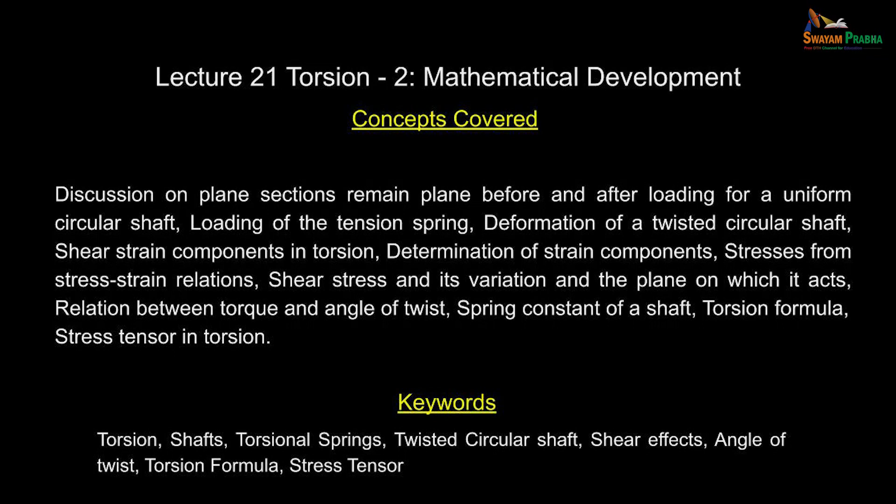Let us continue our discussion on torsion. We have done the thought experiment followed by an experiment, and we have understood certain aspects of torsion.

What we did was we hypothesized that a radial line deforms into a curve. We started deliberately with a wrong hypothesis, and then we looked at the geometry of deformation, and the main point of discussion was invoking the symmetry.

I was able to invoke the symmetry mainly because the cross section is circular. So about this axis, the geometry is symmetric. I consider the material as isotropic, so elastic properties are identical along any direction, and the boundary conditions are also symmetric about the axis.

Based on that, we have concluded that straight lines will deform into straight lines, and we have also verified by the thought experiment: when you rotate it by 180 degrees, what you have at the bottom surface is identical to the top surface. We have not only done the thought experiment, we have also seen it in the actual experiment.

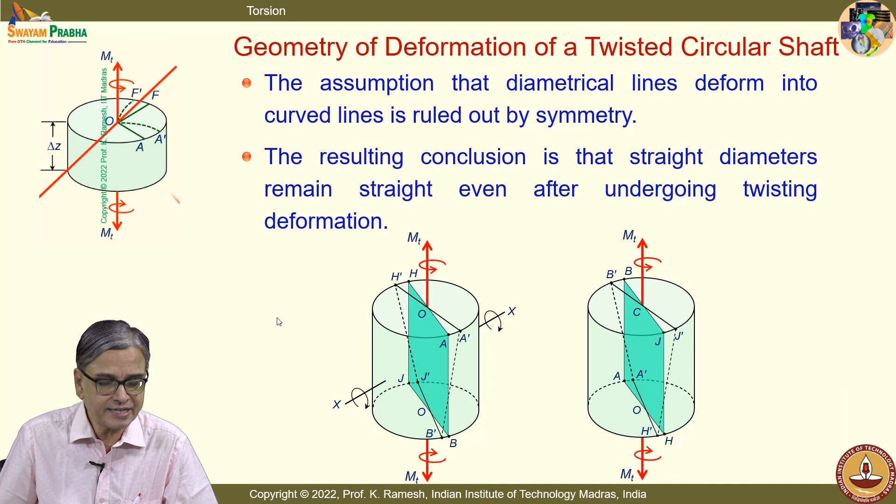So the first understanding is the radial lines will deform into radial lines, and we also observed from the experiment that these radial lines lie on the same plane. Nothing happens to that plane. We have not done a thought experiment for this, but we have done the actual experiment and seen that the plane remained horizontal. But I can also investigate that by a thought experiment.

The only requirement is that the deformation should be symmetric about the axis. Here I can consider that this bulges out and is symmetric about this axis. This happens on every cross section, so this cross section also bulges out, and we know how to test symmetry.

If I rotate the whole system by 180 degrees, it should come out the same shape, which is not going to be the case, because when I rotate it, since it is bulged, I would have this as a cup. So this violates symmetry.

So from the thought experiment also, you can say that these planes remain plane. It is a very important concept. It is also taken as an idealization, but when you perform an experiment, you see that very clearly. So it is no more a thought experiment, we have captured reality in all its totality for a circular cross section.

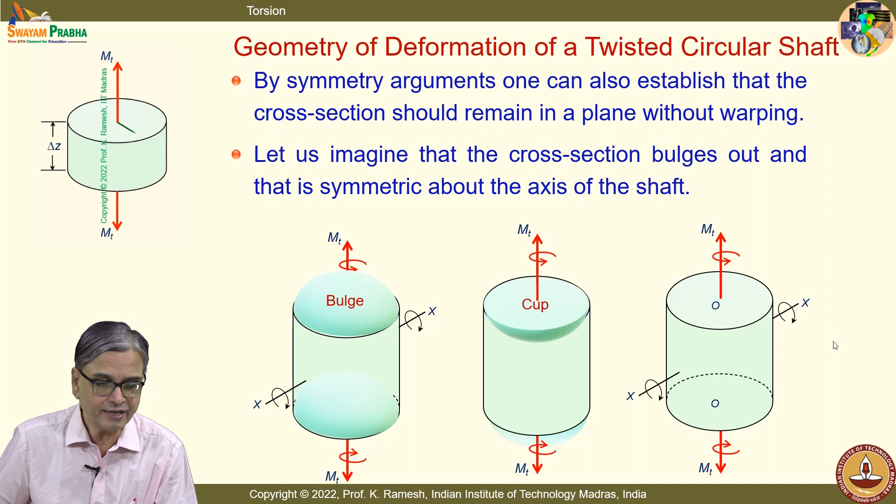This is for a slender member where the deformations are small. All these attributes you should look at. So when I rotate it, you will have the same thing, which is very clear and obvious.

Now I have a circular shaft that is twisted, and you see the horizontal plane as this red line, and the vertical lines drawn in blue. This is a cylindrical object; the line drawn at the back is magnified because it behaves like a lens, that is why you see that shade of blue thick here. You could see very clearly that these lines remain horizontal, and then you have these two lines sheared.

In the case of a square shaft, this line does not remain horizontal, but has a shape like this. My hand was shaky, so when drawn free hand, some kinks are seen, but imagine this is a smooth line. So this has ups and downs, and this is labeled as warping in the literature. We don't go into the analysis of a square shaft in this course.

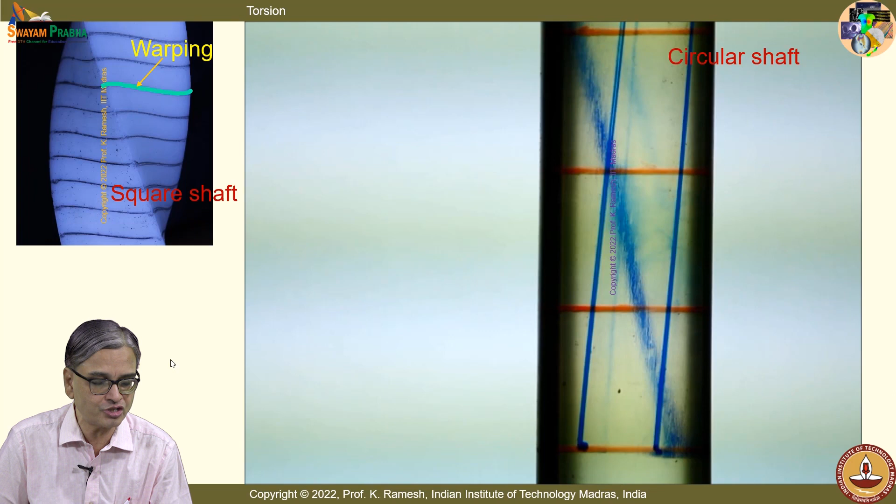In the case of a circular shaft, one of the important understandings is that plane sections remain plane before and after loading for a uniform circular shaft. It's a very, very important observation.

In fact, when we graduate to bending, we would use the same idealization and choose an appropriate loading which satisfies that and develop the bending theory. Whole of strength of materials hinges on plane sections remaining plane before and after loading, because using this assumption we are in a better position to appreciate what deformation is possible.

Once you have captured the deformation, you don't require to solve this by solving a boundary value problem. The deformation is understood; from the deformation, write the strain; from strain, you write the stress-strain relations. So the complete solution is obtained.

So the key point here is how well you have pictured the deformation clearly. What we do in strength of materials is choose simple loading, simple cross section that satisfy this basic idea: plane sections remain plane before and after loading, which you will see for many problems later also. This would be satisfied, so I don't have to solve for deformation by solving the boundary value problem of the differential equations.

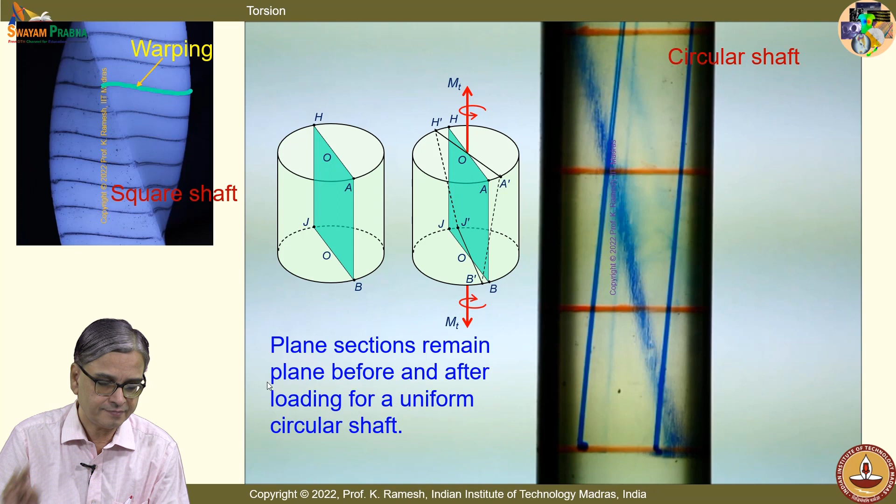I have asked you to exercise your thinking power to find out what happens in a spring, because we all start teaching deformable solids by taking the help of a spring. We use the spring only to illustrate that the force-deformation relationship is linear, and the other aspect is that spring stores energy. So all deformable solids will store energy.

When you look at the sketch, schematically it's easy to represent the spring like a zigzag line, and when you axially pull it, it opens up, and when you compress it, it closes up.

If you want to find out the way a spring resists load, it is not tension or compression. Is the idea clear? You have to look at how the spring is constructed.

The spring is coiled like this, and you apply the axial pull. It is coiled in such a manner that this forms the axis of the spring. So now what I will do is cut at one of the coils here, take this, remove it, and draw the diagram. This is the load that is applied.

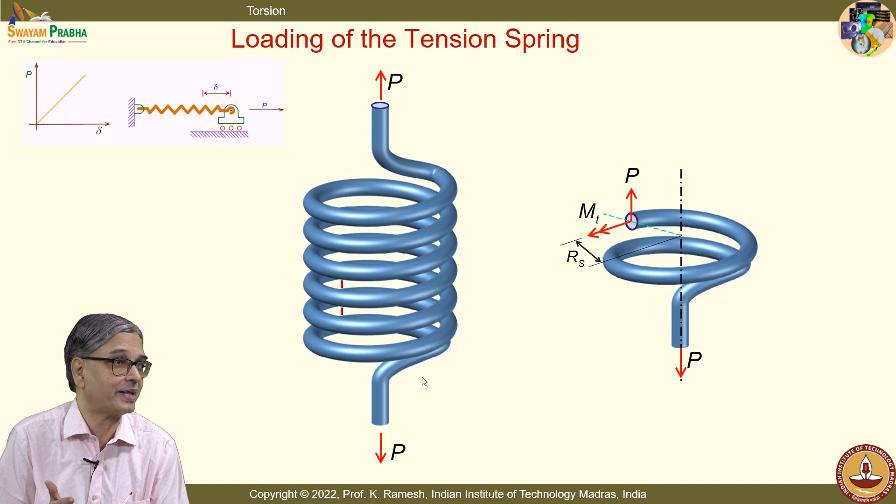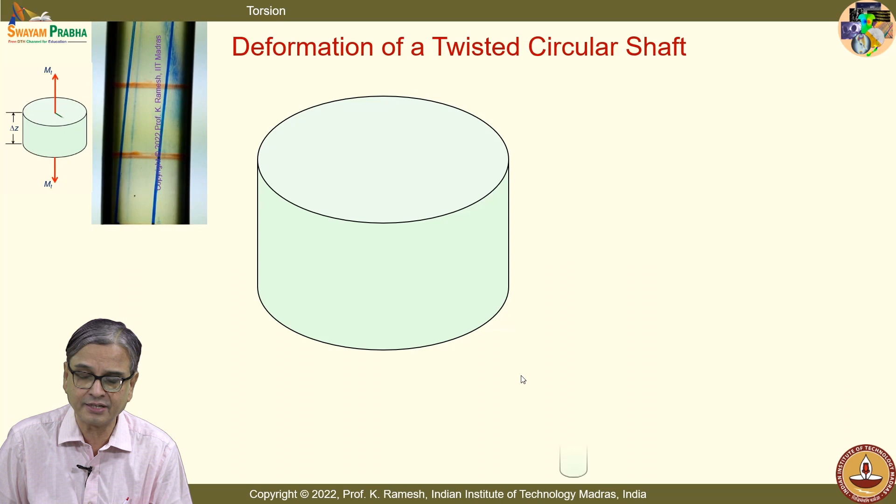Now you need to make neat sketches. I will show the animation slowly, and you have to keep in mind that we are again analyzing only a slender shaft. I take a very small section delta z. I have blown it up for clarity on what is happening in this small section. So don't get carried away by the size, it looks like a huge slab, but it's actually a very slender member.

I have taken an arbitrary section. You can draw the lines and also label them the way that I have done it. Take your time.

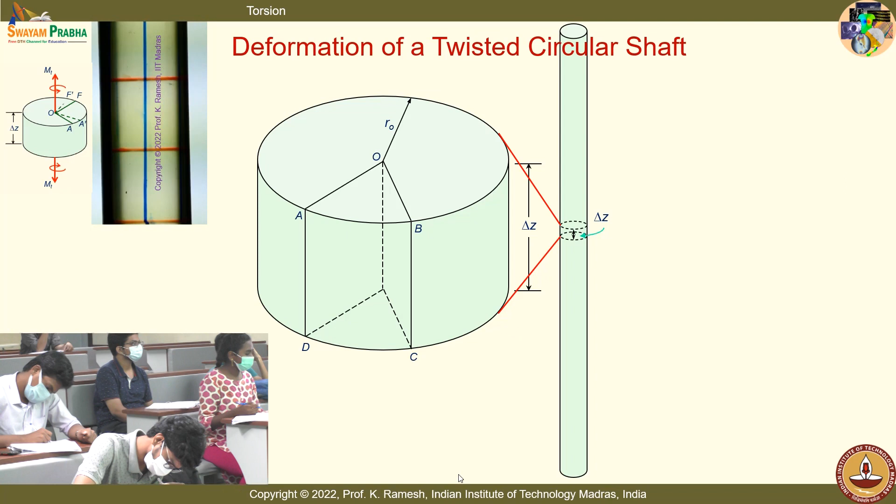What we are also going to do is find out what happens at an arbitrary radius r, on this interior part of the shaft. Because we have already seen, even before developing torsion, that shear stress varies linearly from the center to the outer fiber. So in order to develop that relationship, it is better that we take an arbitrary radius r and find out the dotted lines to start with. The axis of the shaft is taken as the z direction, with radial direction and theta direction. Because it is a circular geometry, it is better to go to polar coordinates.

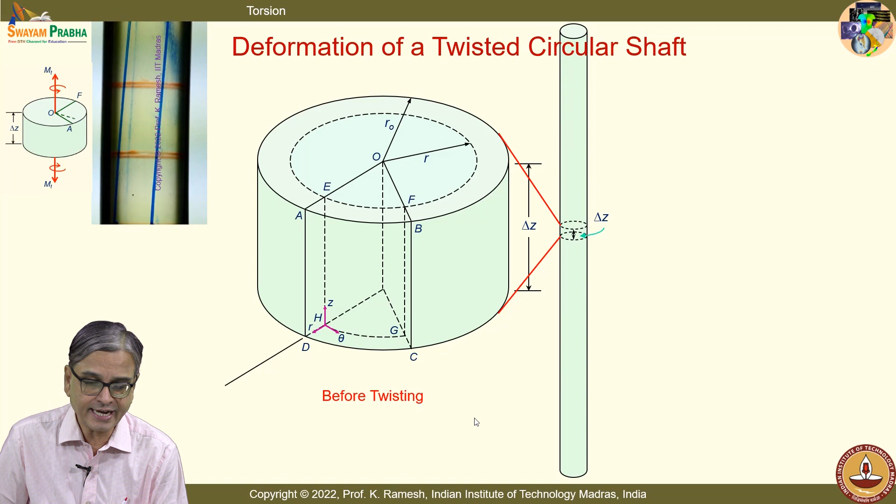This is before twisting, and this is a section somewhere in the middle of the slender shaft. Now what I do is apply a twisting moment. When I apply the twisting moment, I have the twisted shape here. That is what we have to understand, and then find out what kind of changes happen. You also have a nice animation continuously running, which will show you how to draw the deformed lines.

You will have to appreciate, I have a section far away from this end. This section would have twisted by an angle phi. And I have another section at distance delta z away, that is the top surface. It would twist by delta phi. I have phi and delta phi is what you will have to understand.

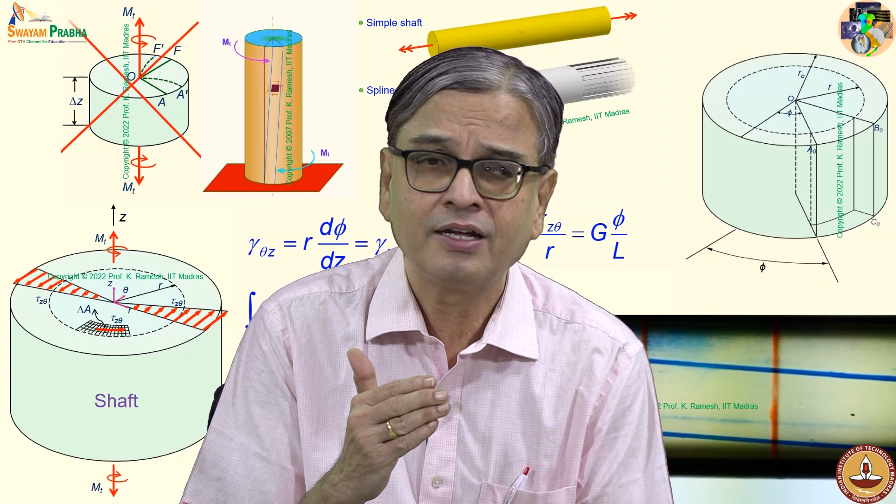So I have this, and I have drawn the same lines here. Whatever lines I drew earlier, my idea is to see how these lines deform because of applying the twisting moment. Once I understand the deformed position of these lines, we already have the definition of shear strain. Shear strain is nothing but change in the original rectangle. So we will have to investigate whether it remains as original rectangle after deformation, or is there any change.

So please draw this. First you have to appreciate, I have taken a section somewhere in the middle, because we do not want to study anything close to the load application point, because of Saint-Venant's principle. So we want to stay away from the end effects.

So when I apply the moment, the bottom of this section would have an angle of twist of phi, and just a slice away, that is delta z away, it will have another angle, which we have not drawn yet. Now we will draw this.

As far as the small section is concerned, only now I am going to put the twisting moment. Because of the twisting moment, this line shifts like this, drawn in red, and I have E1, F1, A1, B1 as the new position. D0 and D1 are identical, and C0 and C1 are identical.

And what you have is this original line E0, A0, that is the black line, and the deformed line is the red line, because we have already seen radial lines remain radial, so the line remains straight, and this small angle is delta phi.

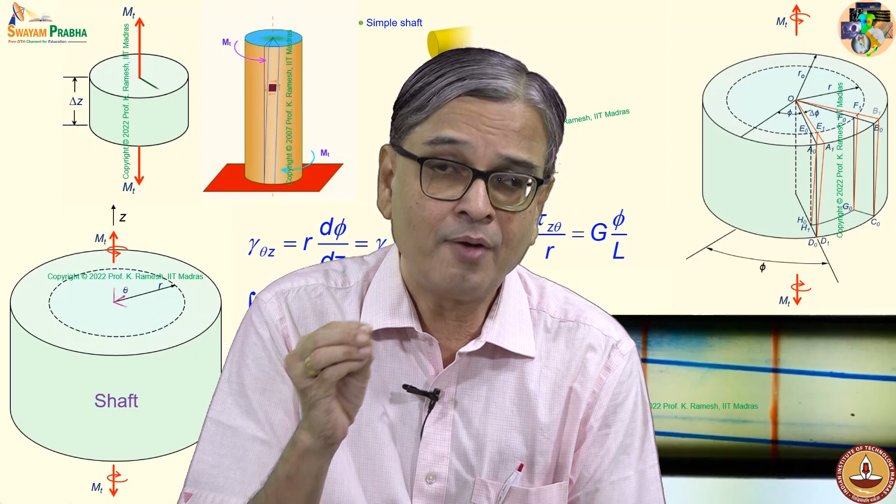We are going to investigate this deformation and find out which angles remain 90 degrees, and which do not remain at 90 degrees. That contributes to the appropriate shear strain, because we have already ruled out the existence of normal strains. You won't have epsilon z, epsilon r and epsilon theta - all three are 0. Among the 3 shear strains, which ones are 0 is what we will have to look at.

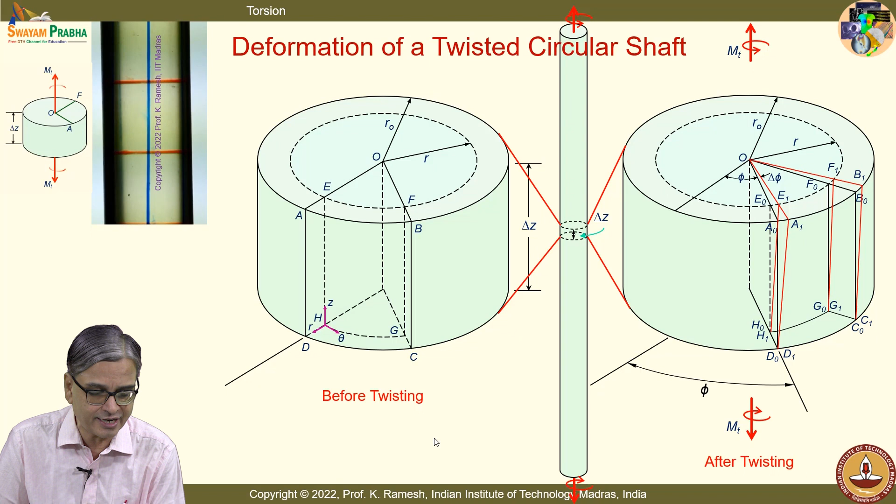But before that, we will first calculate the existing shear strain due to torsion, and this is again explained here. You have to appreciate why I have shown phi here, and why I have shown delta phi here. You should appreciate this, because it is taken somewhere in the middle of a slender shaft. So I have angle of twist as phi and phi plus delta phi.

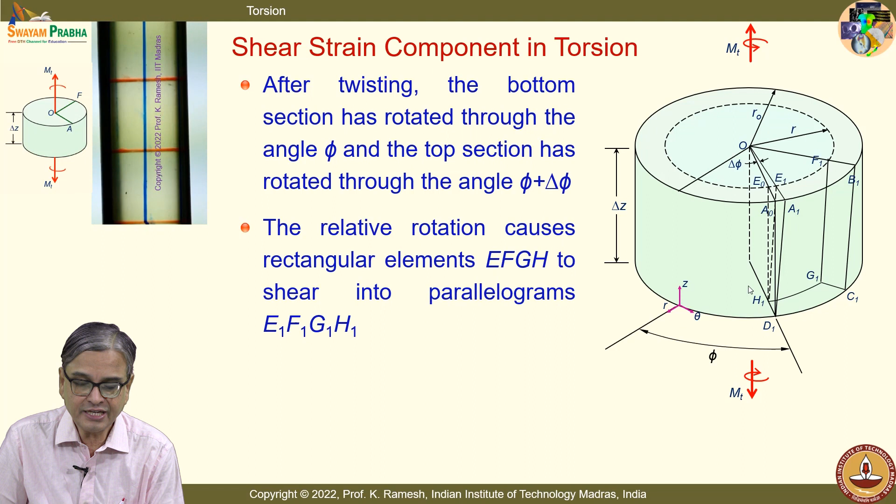And we will see that EFGH has gone into E1, F1, G1, H1. I have followed the same color code - the circles as red and the straight lines as blue, so that you can easily visualize what has happened from this diagram.

I have these blue lines sheared, which we have seen by the experiment - the same thing has happened here. So, the original right angle EHG is sheared into the acute angle E1 H1 G1, which is also shown in a 2-dimensional sketch here. You have already calculated this distance - that is nothing but E0 E1, which is r delta phi. And you know what is this height? What is this height?

So, you have all the quantities, so you can find out what is the shear strain. And you should also be able to say, how will you label this shear strain?

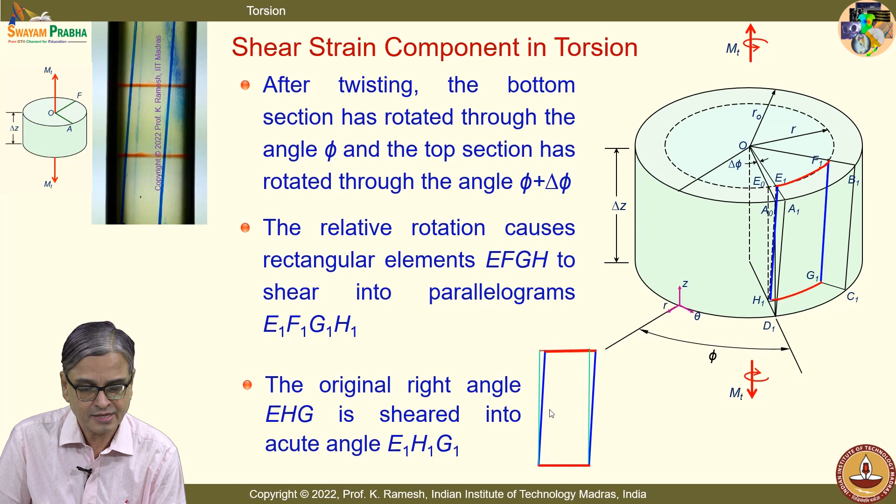I have the axis r, theta, z labeled like this. We have seen that this has sheared, and we are in a position to identify this angle and also this distance. This is happening between what axis? Theta and z. So I have this as gamma theta z.

See, tensorially we want to have epsilon theta z. If you want to write a transformation relation, we want to write epsilon theta z. But all the development in the early part of strength of material, they have done it only with gamma. And epsilon theta z is 1/2 of gamma theta z.

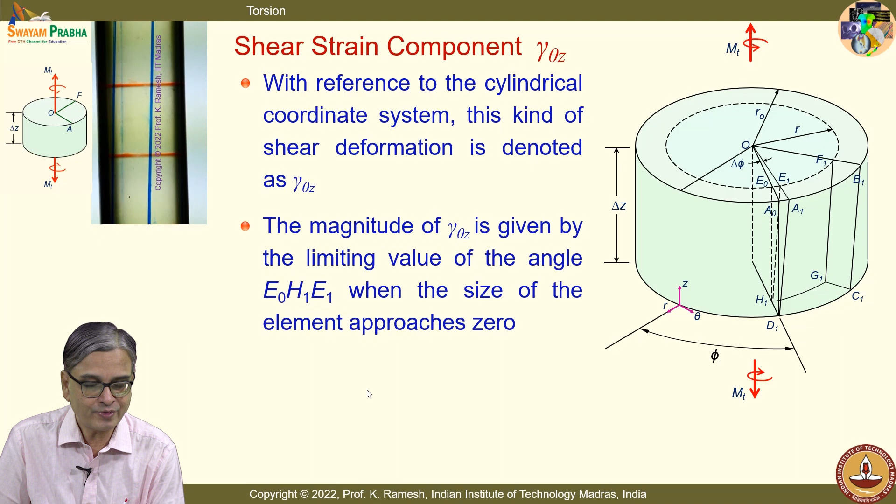Now, we have to find out what is the magnitude of gamma theta z. You have already done half of it. We will fill in the mathematics and get the values. And we will also have to understand in the limit delta z tends to 0, that is what we are going to approximate. And again, this is shown for you to give appreciation that the blue lines have sheared.

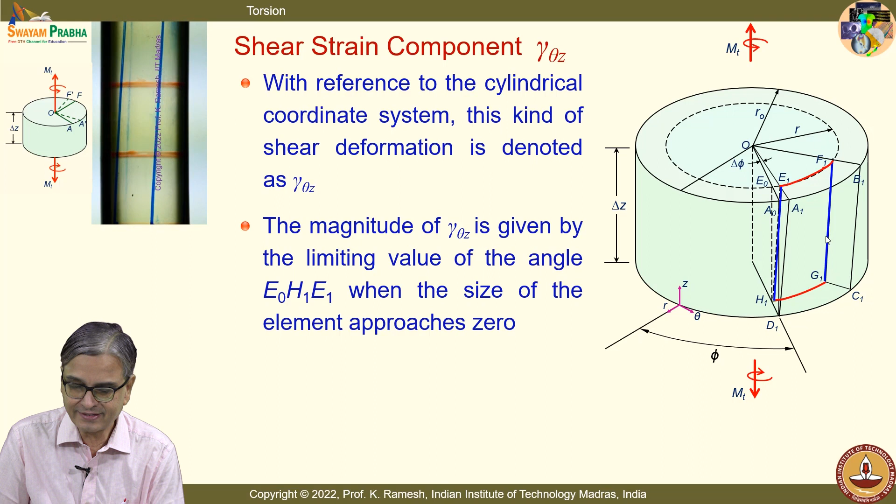And we have already looked at the geometry, and you have already told me what is E0 E1. So I can have gamma theta z as limit delta z tends to 0, because we write tan theta, and since theta is small, we write the ratio, the appropriate distances. So E naught E1 divided by H1 E naught will give you, and E naught E1 you already said correctly, R delta phi, and then H1 E naught is delta z. So this gives me R d phi by dz as your shear strain component gamma theta z.

You will have to appreciate that this is a function of R, and how we have looked at R, this is 0 here, and you have the generic R here, and this is R max. So R changes from 0 to R max. So your shear strain also will change linearly over the cross section from the center to the outer radius. Outer radius has the maximum value of shear strain.

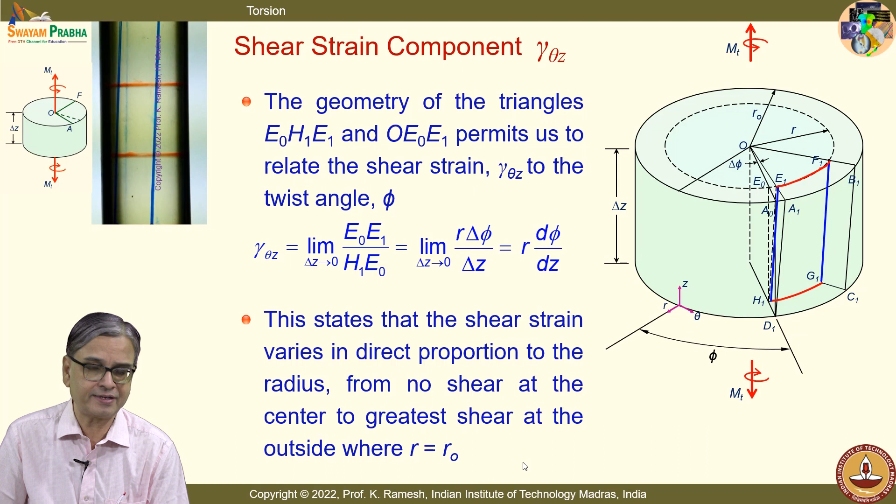So that is what is documented here. The shear strain varies in direct proportion to the radius, from no shear strain at the center to the greatest shear strain at the outside when R equal to R naught. R naught shows O means outside diameter, outer diameter, whichever way you can take it.

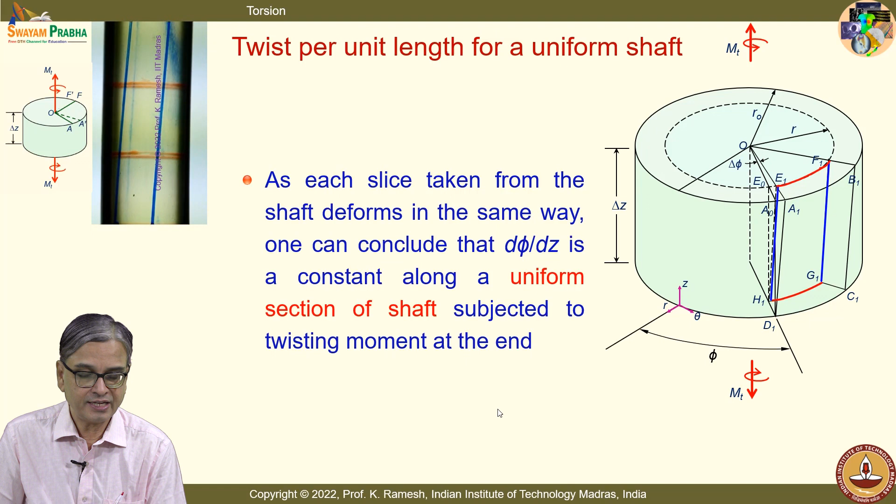And let us look at another aspect. One can also conclude, if I have a cylindrical shaft, d phi by dz is a constant along a uniform section of shaft subjected to twisting moment at the end. So I can have a twist varies linearly over the length.

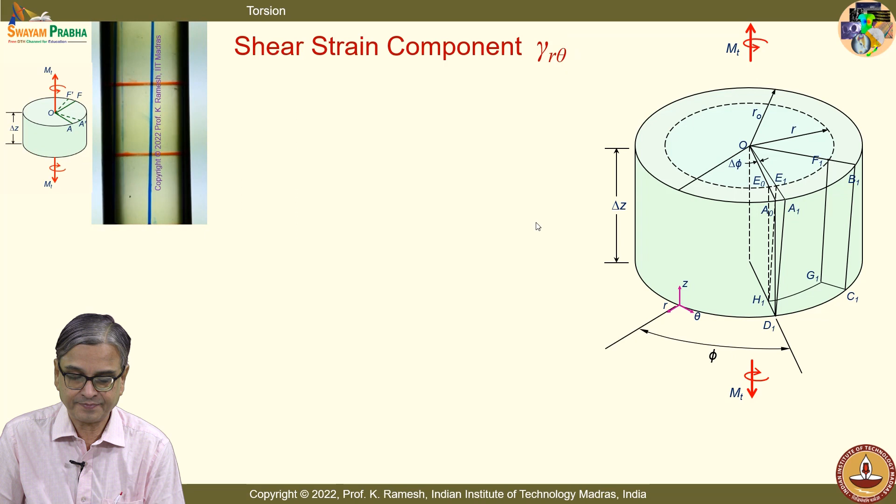Now let us look at what happens in the r and theta directions. So r and theta directions means I have to worry about what is h1 d1 and h1 g1. So we have, originally it was DHG, now this is D1 H1 G1,

and if you look at, if I draw the tangent to these lines, you will find that included angle is 90 degrees. There is no distortion there. If the original angle is preserved as 90 degrees after deformation, you say that component of shear strain is 0. So I have gamma r theta goes to 0. So you see these two lines, radial line and the circumferential line, and if you draw the tangents to this circumferential line and find out what is this angle, it will still remain as 90 degrees.

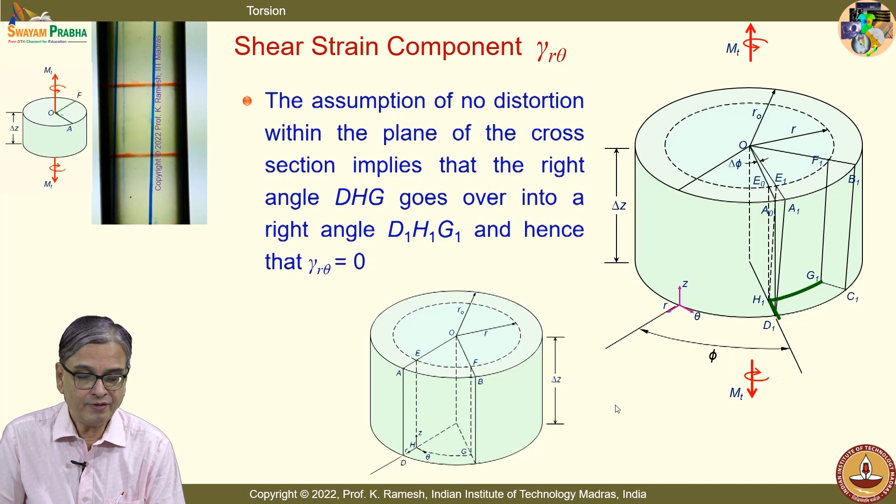Then we move on to the shear strain gamma rz. So when I have to look at r and z, I have to look at what happens to E1 H1 D1, that is E1 H1 and D1.

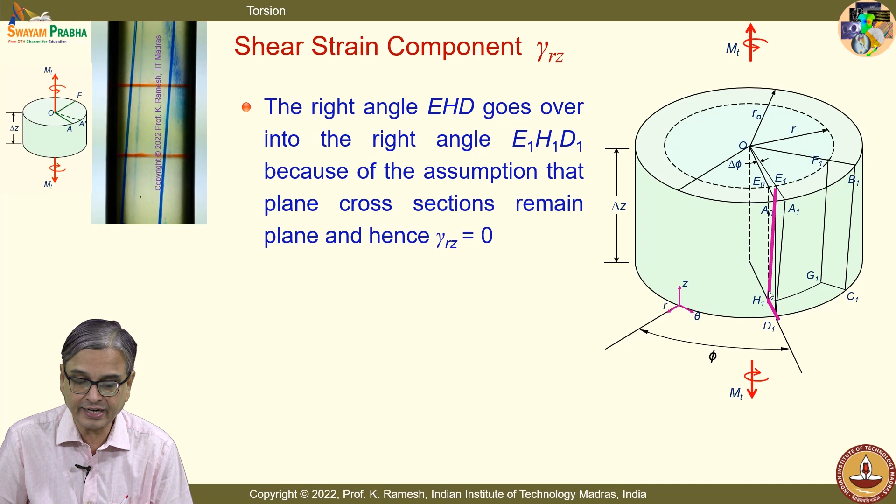Here again, if you draw the line, it is only sheared like this. You can see very clearly here, sheared like this. The blue line is shown as pink here for this purpose. And if you look at what is the angle between D1 H1 and H1 E1, here it will be 90 degrees. So gamma rz is also 0.

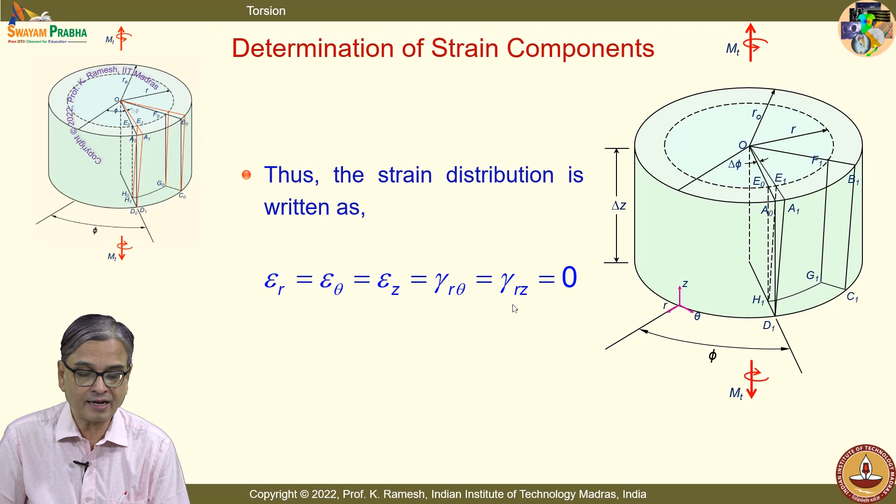So I have the strain components. 5 strain components are 0: epsilon r, epsilon theta, epsilon z, gamma r theta, gamma rz, they are all 0. The only shear strain that is existing in torsion is gamma theta z, and that is given as r d phi by dz. Is the idea clear? See, we have taken a very simple problem to illustrate.

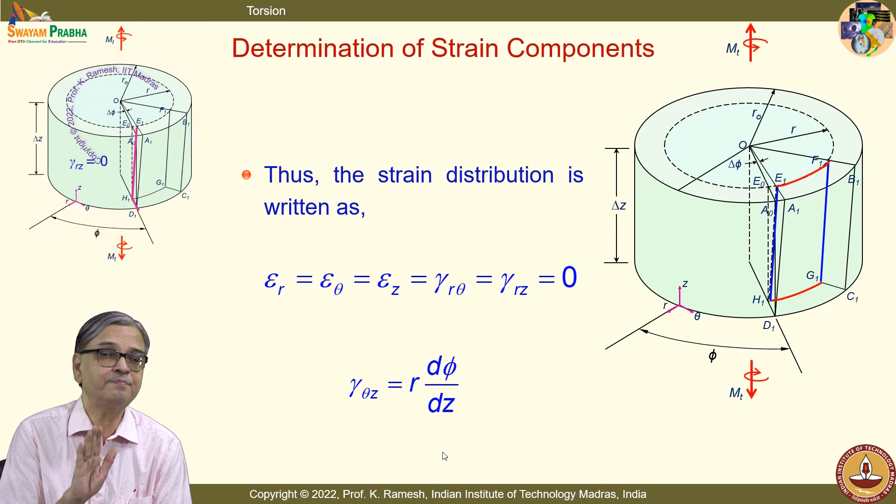Understanding developed here can help you solve even complex problems. If you have a stepped shaft, definitely in the region of a step there will be disturbance. So you can either bring in a stress concentration factor, or a factor of safety, or some other empirical relation if the structure is too complex, to wriggle out from that zone. But for the rest of the zone you have an exact solution. That is how engineers operate.

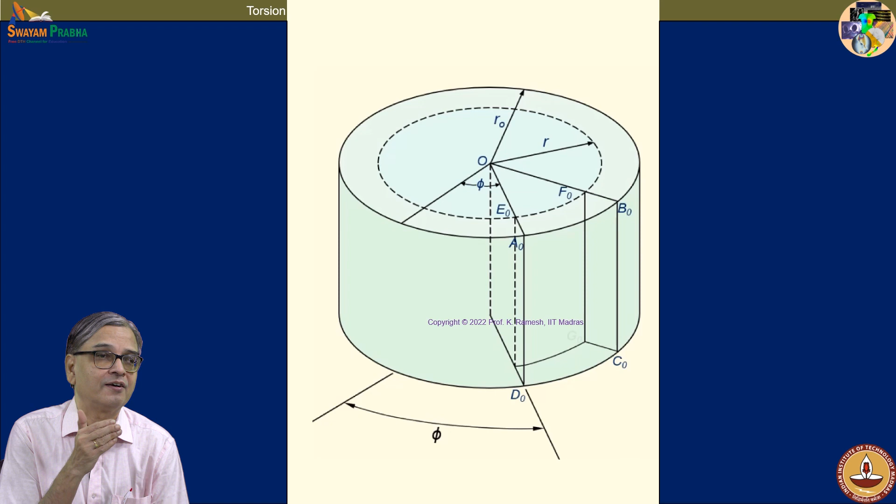So whatever we have discussed is repeated as animation here, so you can ruminate and see stage by stage how we have looked at the deformation. From the deformation, we have figured out what the non-zero strain is, and we have also written it in terms of the geometry of the problem.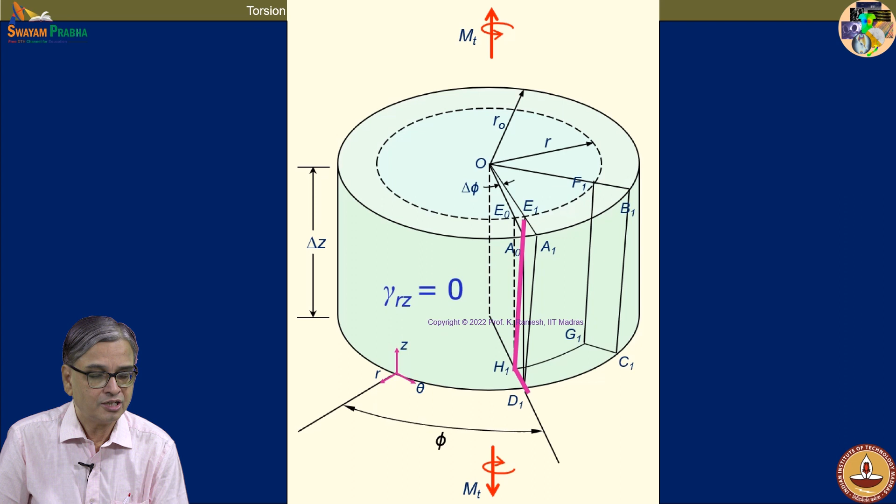So it is obtained as gamma theta z, and then gamma r theta is 0, and gamma r z is 0. So you have the strains given. The only restriction placed on the material is that it must be isotropic.

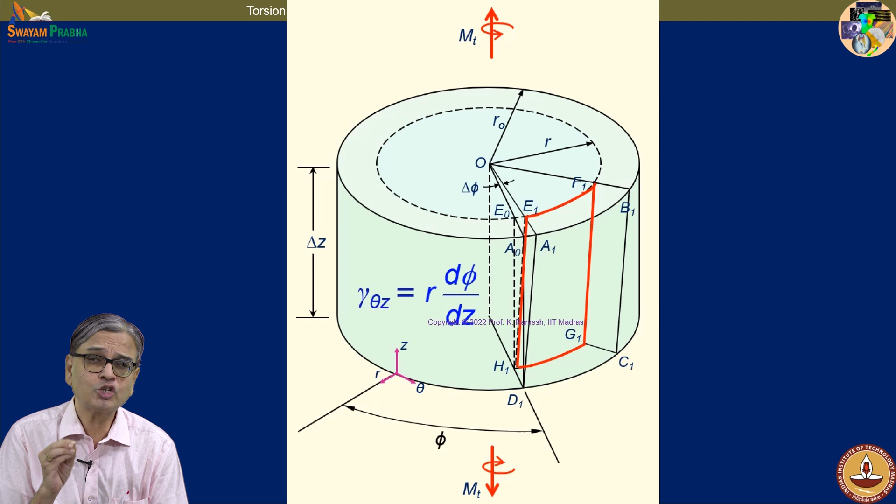Only then can I invoke symmetry conditions. If the material is not isotropic, all my discussions go for a six. Fortunately, many engineering materials can be modeled as isotropic. So whatever relationship we have developed can easily be applied to elastic conditions, plastic conditions, linear or non-linear, as far as the strains are concerned.

So if the material follows Hooke's law, the stress components are given as: when 5 strain components are 0, 5 stress components are also 0. We have already seen in the case of isotropic material, normal stresses produce normal strain, shear stresses produce shear strain. There is no coupling. The coupling happens in materials other than isotropic.

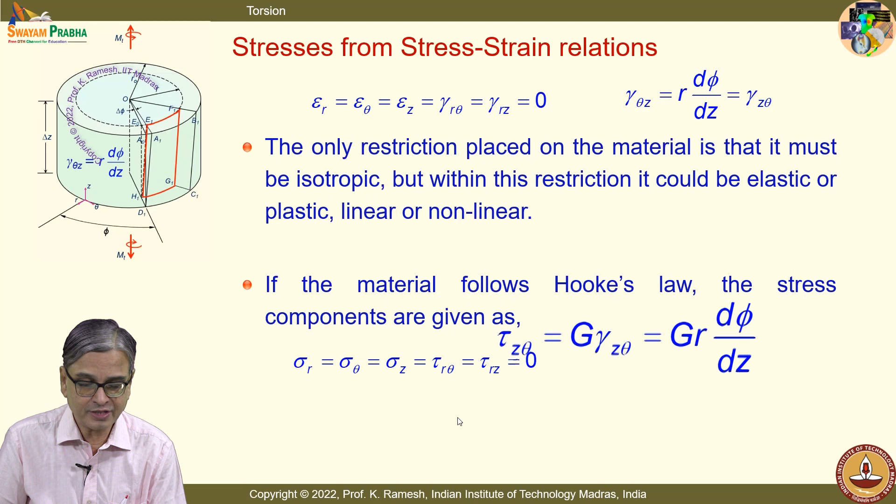So from the knowledge we have already gained in stress strain relation, I can find out tau z theta equal to g times gamma z theta. And you would have noticed I have used the idea of equality of cross shears or cross strains. That is what is shown here: gamma theta z is identical to gamma z theta, and similarly tau theta z equal to tau z theta.

And now you have an expression g r times d phi by dz, where g is the shear modulus, you all know. So now we have the exact solution, even though we started with a hypothesis. The hypothesis is verified by experiment, so what you get from the relationship now are exact solutions.

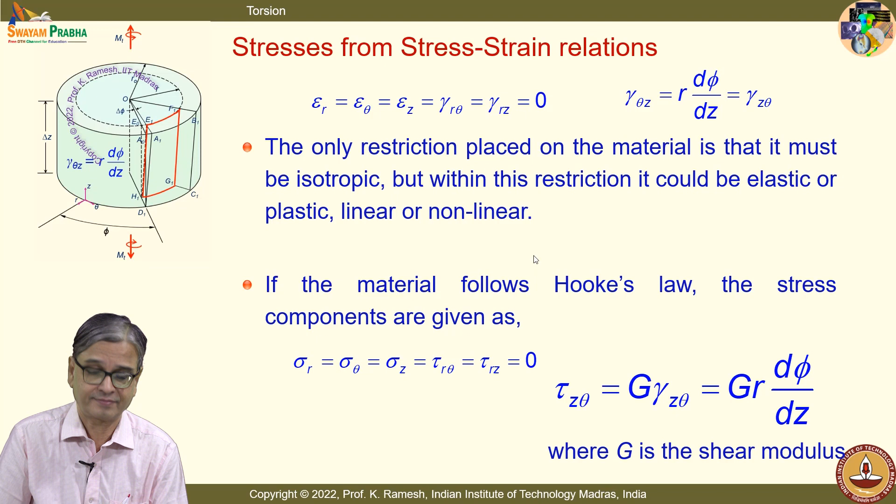Whenever you learn the subject, you take the shaft and twist it here. Initially when I hold the shaft, there may be some relative motion between my hand and this member, but once I do it, I am only applying twisting. There is no relative movement of my hand, and whatever twisting moment is developed is transmitted by the section, and this complete surface is free. You have to appreciate that.

So what I have here is, you have seen how the shear strain is developed. Now we look at the shear stress. I take a small area delta A, and I have this shear component, because we have the symbolism: the first symbol should tell the plane. This is the z plane, and the direction is theta, so tau z theta.

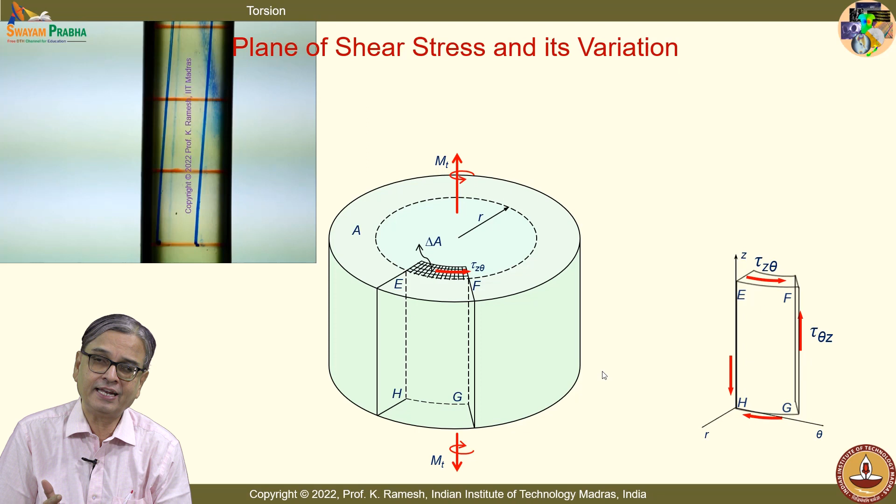And when I take out an element like this, you put the reference axis. You can make a neat sketch, please. I have a shear stress component developed, and you have the complementary shear. From your equality of cross shear, you know these two shear components are equal in magnitude. I have this labeled as tau z theta, and this is tau theta z. From your understanding of solid mechanics, cross shears are equal, so this is the shear stress that you have.

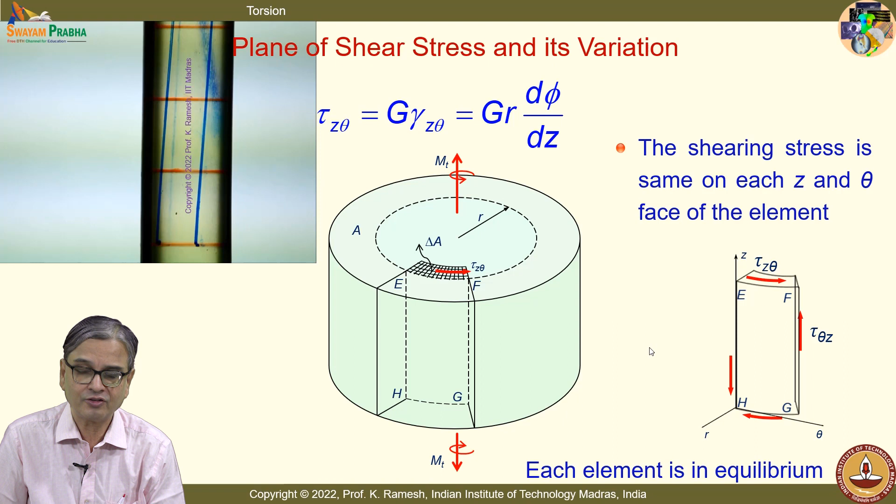That is what is summarized here: the shearing stresses on the plane z and theta are of the same magnitude, and each element is in equilibrium. We have not yet verified the equilibrium condition; we will go and verify it in a short while. And shear stress varies linearly, we will also picturize this. So I will have maximum shear stress, and then it tapers down to 0 at the center.

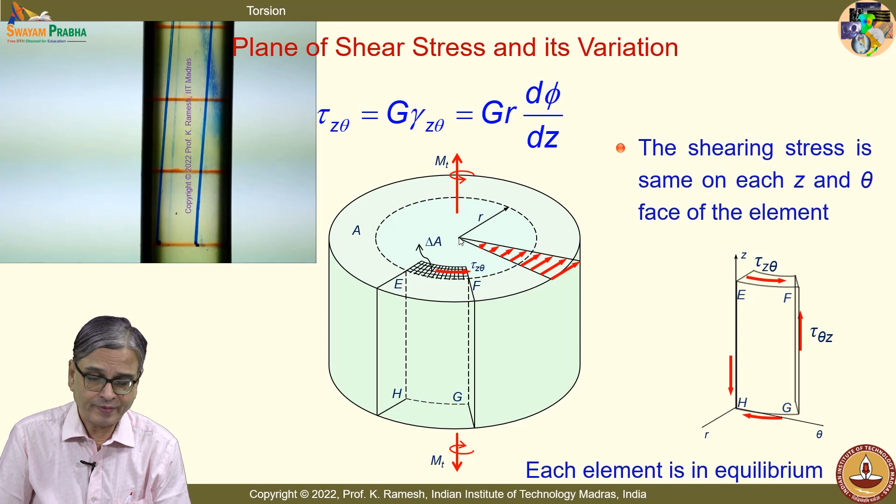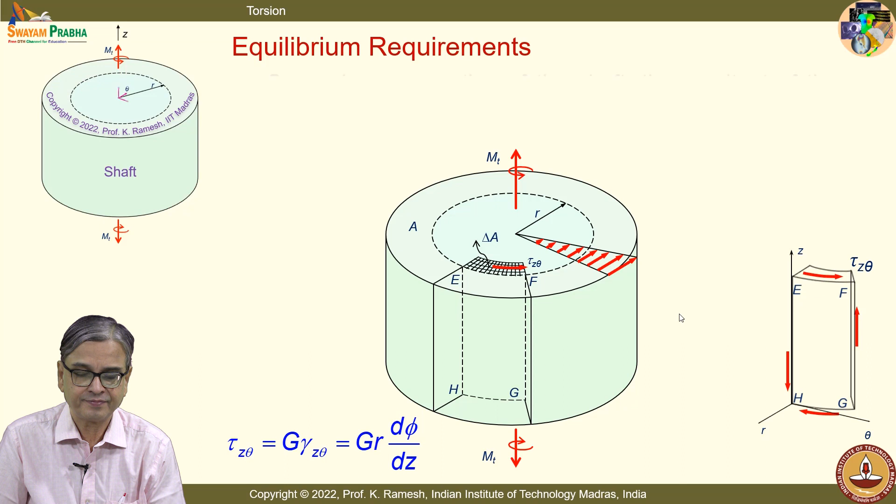And how do you establish equilibrium? Whatever shear stress is developed should balance the applied torque, isn't it? So when I write the equilibrium condition, I have repeated the same figure so that if you have missed out, you can correct your figure. I am going to write only the equilibrium condition, and it is also shown that this is varying as a triangular variation. On each section of the shaft, the resultant of the stress distribution must be equal to the applied twisting moment.

So your integral r tau z theta dA, this is what is shown. I have the shear stress acting on an area, so I can find out what the force is, and once I take the moment, the moment arm is r, and I do it for the complete area. A represents the complete area of this circular cross section. That should be equal to the twisting moment.

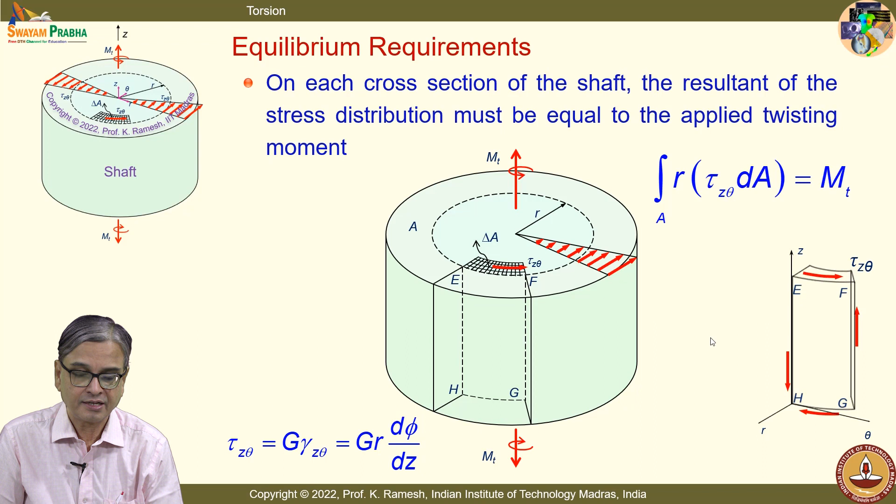And when I do this, I also get an interesting expression when I substitute the expression for tau z theta. What I want to emphasize here is, suppose I take the model and apply the axial load, you can easily visualize that each cross section transmits the same axial load.

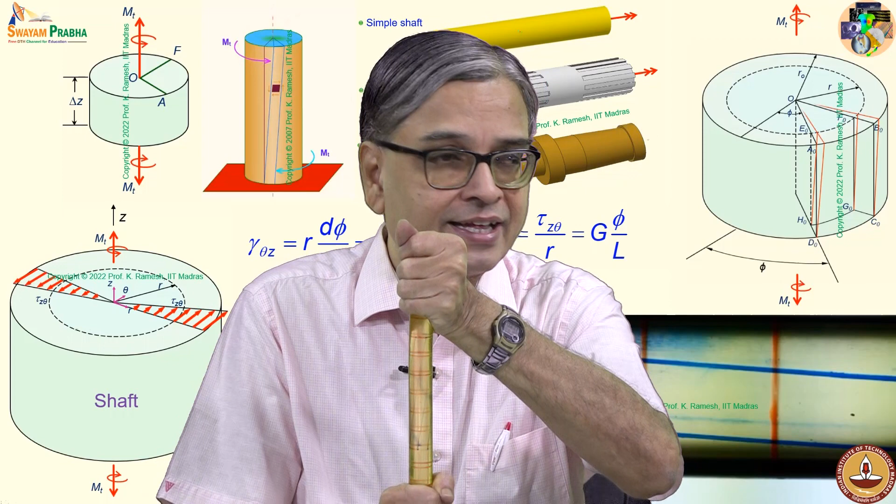Somehow when people change the problem to twisting, they have a doubt, because we have shown the shear as tangential to this on this cross section, people have a feeling that you are applying something on this surface.

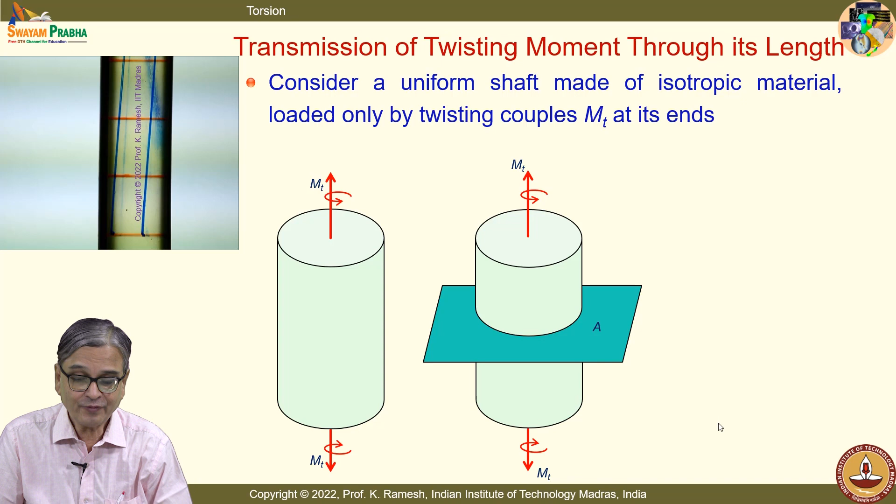We have done a detailed discussion on free surface. So what you have to appreciate is, when I have a section like this taken out, you will have shear stresses developed on this surface that would balance the twisting moment. If I look at the lower section, this will also have the shear stress developed on this surface and balance the twisting moment, and the entire shaft will be transmitting the same twisting moment along its length.

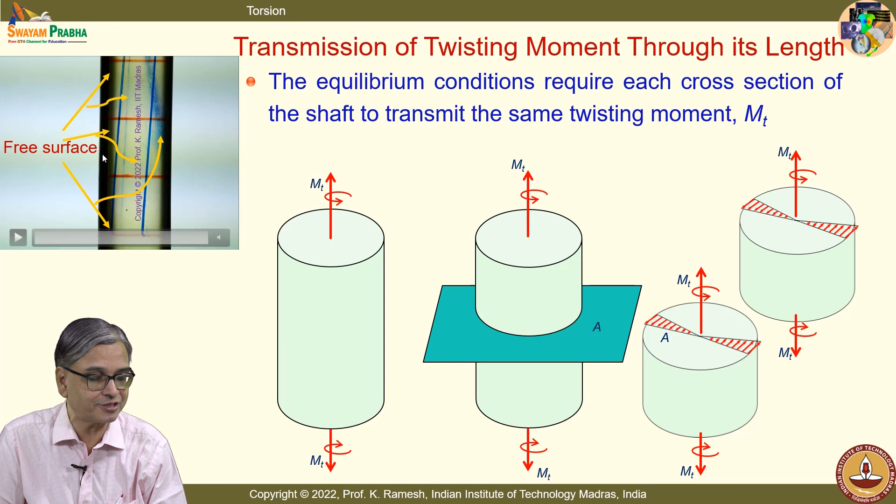That aspect has to be appreciated clearly. Whatever I have told you earlier, I have also summarized this in the sketch. So all this portion what you see is a free surface. You know what is the definition of free surface. If you go and write the tensorial nature of stress developed in torsion, find out the stress vector acting on this plane, the stress vector will go to zero. That is what you call a free surface.

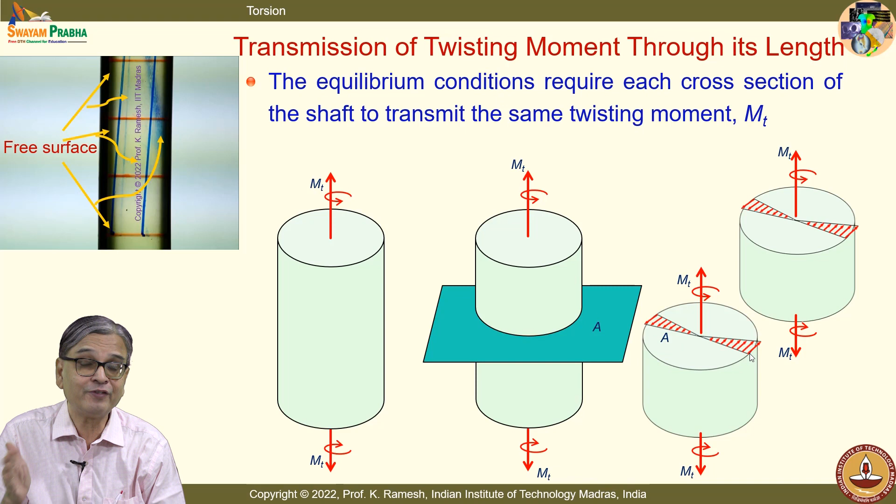So now what you have to appreciate is, when I take a slender shaft and put any arbitrary cross section, you should visualize that this cross section develops the necessary shear stress. There is nothing on this surface. So when you take a point on the surface, you should look at which plane is free surface and which plane you can have shear stress acting. That clarity has to come.

Now let me ask one another interesting question. See, I said that twisting of a square shaft is difficult from a mathematical analysis point of view. When I have, instead of a circular shaft, a square shaft, you agree that all of these places is again free? From your knowledge of the solid mechanics development so far, you can find out definitely what is the stress tensor on the four lines in a square shaft. Do you agree with me or not? I have given you the clue. I am not talking about stress. I have said stress tensor.

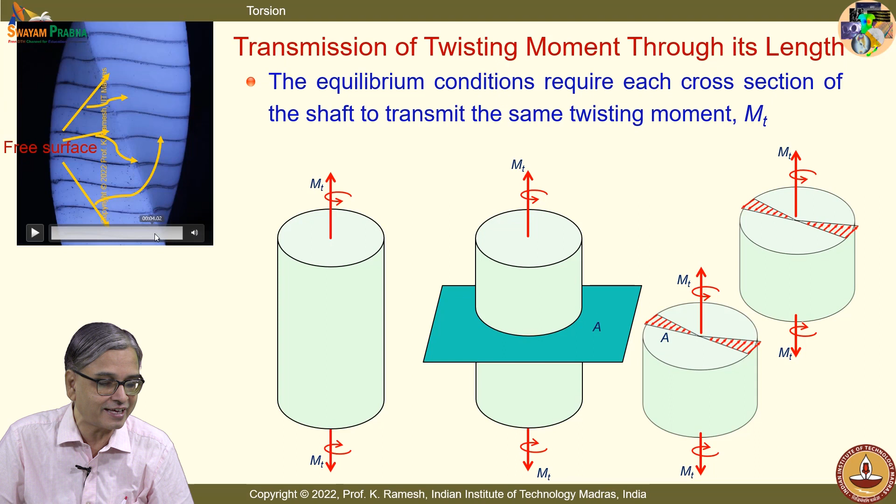And you have to connect it with what we have learned, that this is a free surface. And you have to imagine that you have a square shaft. So what do you have in a square shaft? You have outward corners. So you know from your earlier discussion that if I have the outward corner here, which is free here, and it's also free here, what should be the stress tensor?

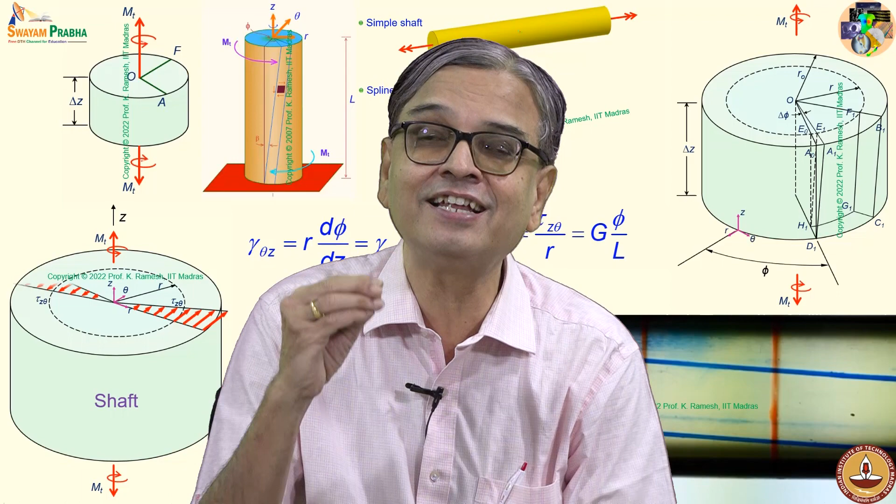I am happy. So the knowledge we develop should help you to answer certain questions, if not all questions. Is the idea clear? So even though you have a square shaft under torsion, you may not find out the stresses completely in this course. From the knowledge you gain, you can at least say what happens in the outward corners.

Excellent. Now, whatever we have discussed, a very nice simple animation is put here. I have radial lines remain radial and longitudinal lines get shifted like this, and this summarizes the complete picture of what happens in torsion beautifully.

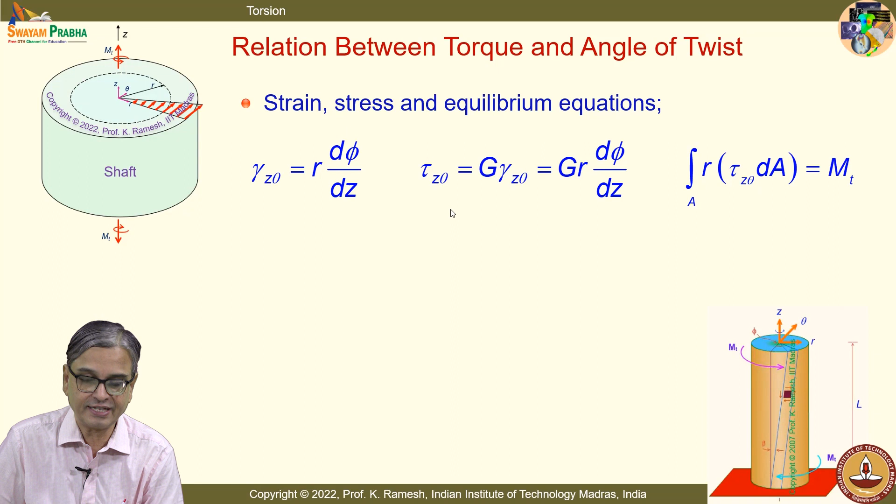And we will just summarize the expressions. So I have gamma z theta equal to r d phi by dz, which we have seen as shear strain by looking at the deformation. From stress strain relations, we have got what is shear stress tau z theta. From equilibrium, I have got this. Now I can substitute for tau z theta in terms of G r d phi by dz in this expression, and you get a mathematical entity.

And I have also asked you a class back in mathematics, what is it that recognizes the cross section. I raised the question, I have asked you to think about it. So when I substitute here, I get this twisting moment as integral r squared dA. What do you learn from your property of cross sections? This is also the polar moment of inertia. So the moment of inertia understands the cross section, because if I change the nature of the cross section, the moment of inertia will change.

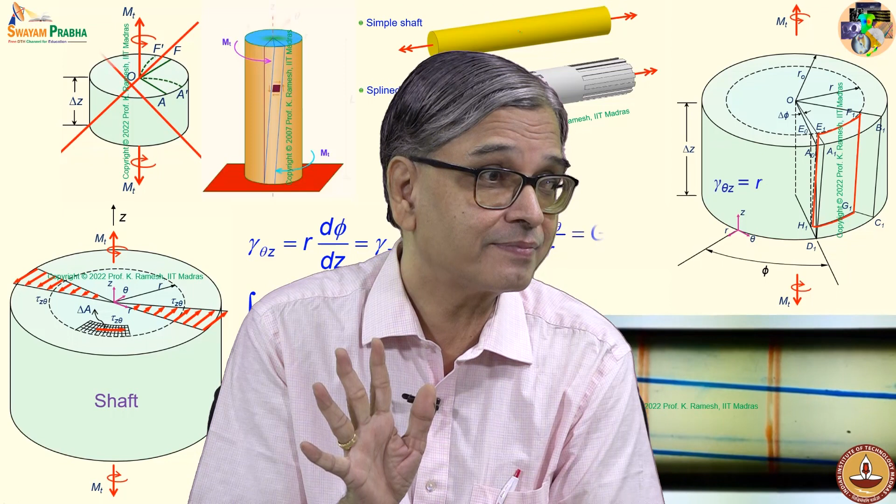If you ask how mathematics recognizes your cross section, you can say that when I look at the moment of inertia, it understands the shape. If I look at area, it does not understand the shape. I can have cross sections of various geometry having the same cross-sectional area, but the moment of inertia will change. So it is another way of looking at it. While developing this, we have taken the axis as z along the shaft.

I have also said that this is Iz. But when you go to bending, you may have different axes where Iz will have a different connotation. In order to avoid confusion, it is better that we replace Iz with Ip in our problem solving, indicating its polar moment of inertia. I may not have done that in all my expressions.

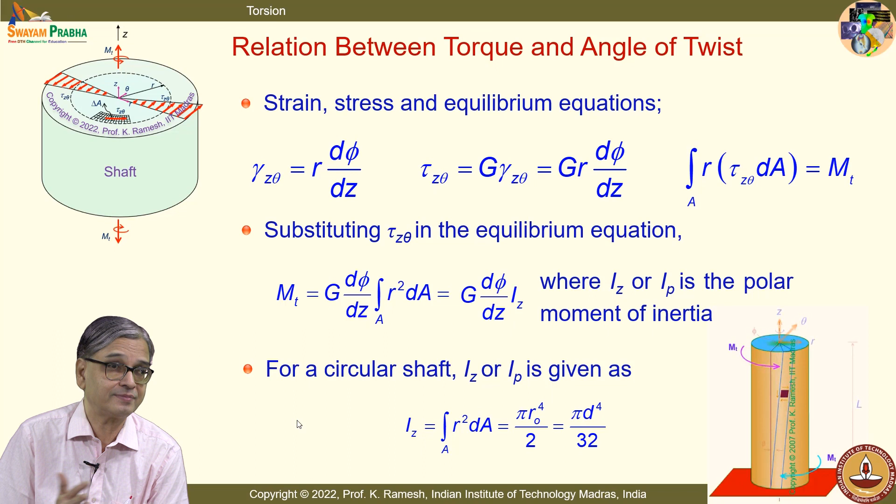So, for a circular shaft, Iz or Ip is given as integral of r squared dA, which equals pi r naught power 4 by 2. If you write it in terms of diameter, it comes to pi d power 4 by 32, which you will be repeatedly using. You should understand that this is also the definition of Ip, because if in this chapter you write twisting moment as Mt and the moment of inertia necessary for calculation as Ip, you will not make a mistake when you go to bending. There should not be confusion between the two.

We can also establish a relationship between torque and angle of twist. The rate of twist in terms of the applied twisting moment is given as d phi by dz equal to Mt by GIp. And GIp also has another name: this is also known as torsional rigidity. The product GIP is also known as torsional rigidity.

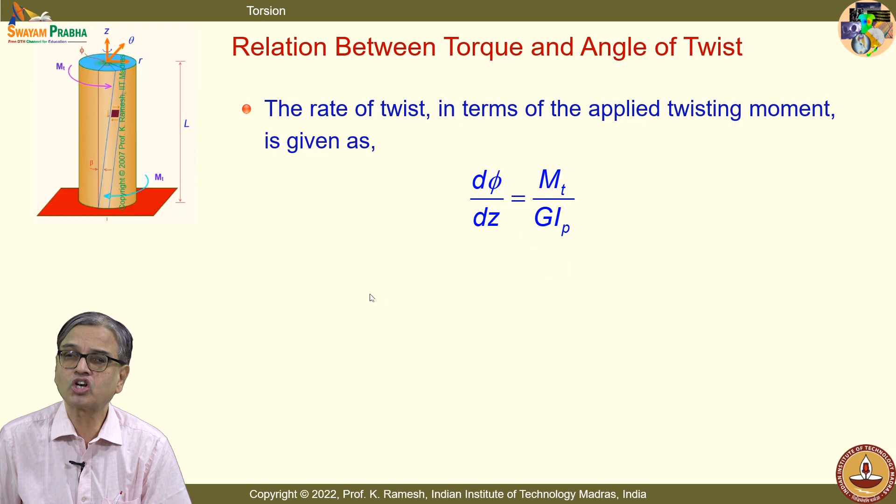Suppose I have a shaft of length L loaded at the ends by a twisting moment. The total angle of twist is given by phi equal to the integral from 0 to L of Mt by GIp, multiplied by dz, which equals MtL by GIp. So for a cylindrical shaft, you can find out the angle of twist comfortably.

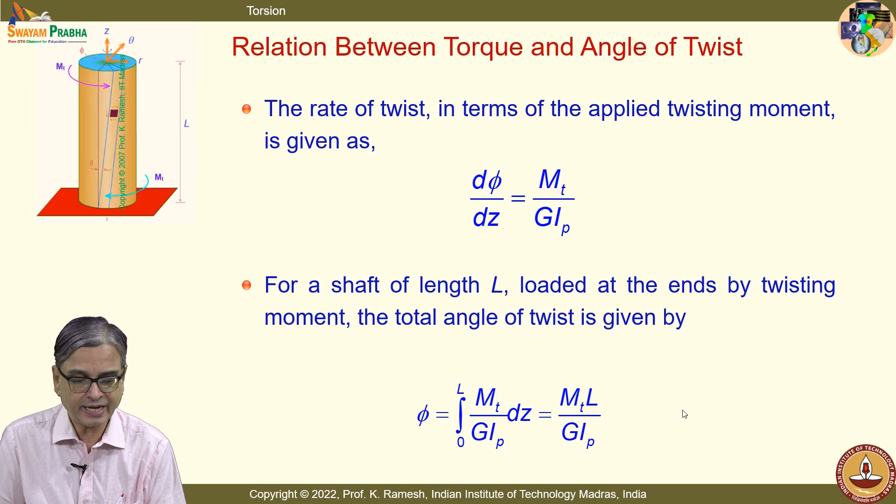We also discussed one problem on the variation of twisting moment along the length, where the twisting moment was varying as a function of length. There you can use integration properly, so I can also find out how to determine the angle of twist for a varying twisting moment. All that is embedded in the expression, which can be used to estimate that case too. But in the simplistic case, with a cylindrical shaft and constant twisting moment, you can simply say MtL by GIp.

I said that you also have a torsional spring. The moment you say spring, you can visualize what a spring constant is. In the case of a tension spring, you talk about axial force and axial deformation. In the case of a torsional spring, you have a corresponding generalized force and generalized displacement. So instead of the axial force, you have a twisting moment, and instead of axial deformation, you have a twisting deformation, the angle of twist.

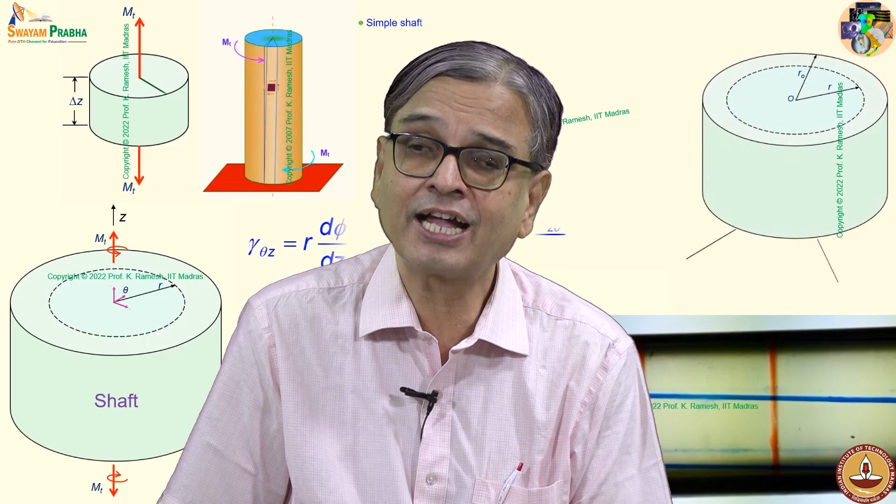You have to appreciate that the angle of twist in all our mathematical development is only in radians. So you have to convert it appropriately from radians to degrees while solving the problem, because all our discussion till now has phi always expressed in radians. So the ratio is analogous to spring constant, and GIp by L can be called torsional stiffness. I have already said the product GIP is known as torsional rigidity.

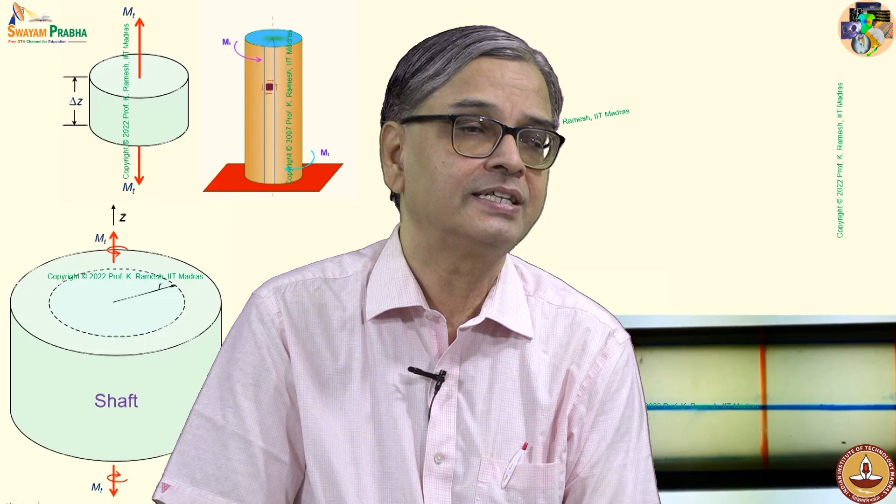This idea of rigidity comes because we graduate from rigid body mechanics to deformable solids. And when you go to deformable solids, we consider small deformation. So when you looked at basic solid mechanics, we felt that when there is shear, it distorts, which is why you also call that the modulus of rigidity. So somewhere or the other, you want to hang on to your rigid body mechanics.

If the shaft was rigid, it would have been very, very stiff, you cannot twist it at all. So the product GIp is also a measure of how well the shaft can resist torsion. If the torsional rigidity is higher, the angle of twist will be smaller. A higher value indicates it is more and more rigid.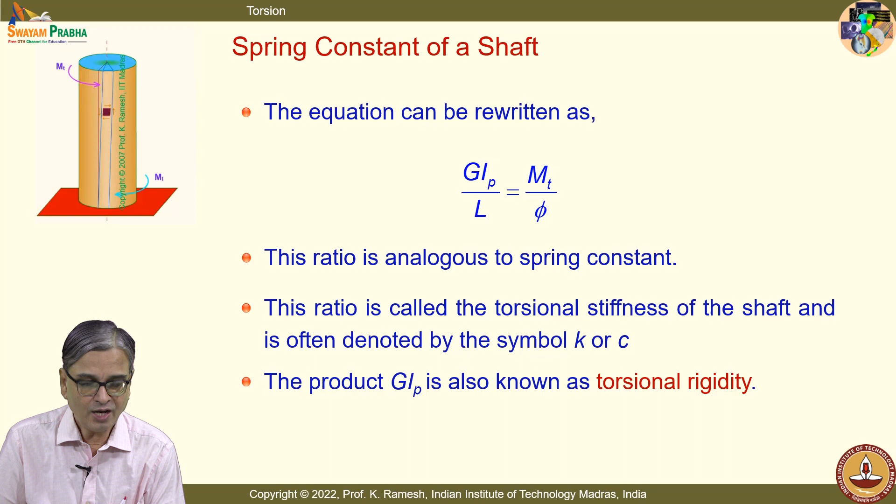Now we should also summarize this as expressions. You have radial lines remaining straight, that is what is shown here. I have a radial line, this remains straight, and longitudinal lines remain straight, but they get spiral, they get twisted like this. And this is a famous expression.

This is valid for a cross section of circular shaft of uniform cross section with only a constant twisting moment applied. We have already derived that the angle of twist phi equals MTL by GIP. So this is known as the torsion formula.

You will have a similar expression appearing in bending, which we call the flexure formula, valid for uniform cross section and only constant twisting moment transmitted. Instead of twisting moment, you will have a bending moment and appropriate moment of inertia, and also the appropriate normal stress. You will have an equivalent formula in bending.

So it is better to remember this formula, and also understand its limitation: it is for a uniform circular cross section and constant twisting moment.

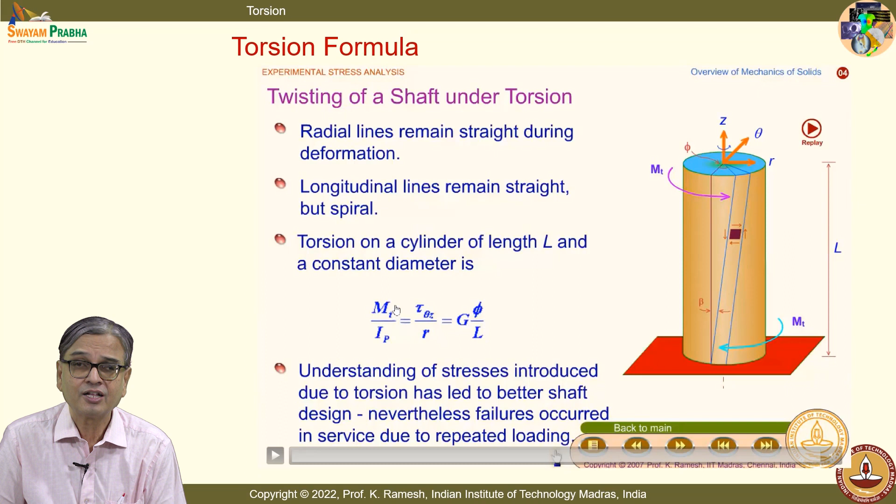I have always told you in this course, when you look at a stress component, it appears like a scalar. Do not get duped by it. While developing what stresses are developed in torsion, we have also looked at the deformation, component wise, and we have evaluated the component tau theta z. It appeared only like a scalar.

Only when you put it in a matrix and call it a tensor, when you do the transformation, you will recognize that it behaves like a tensor. Also, when you have a combination of different loads and need to add them using the principle of superposition, you have to look at the axes. If you are in a correct set of axes, then you will be in a position to add them directly, or transform it and then add.

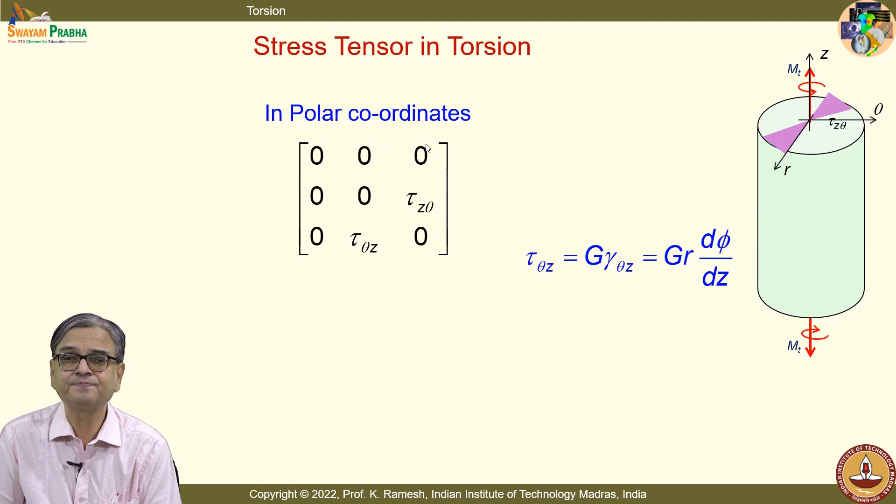So it is better that you put it in polar coordinates in one form. I will have this as tau z theta and tau theta z, with r, theta and z. You should recognize the shear stress developed in torsion is also a tensorial quantity, because we reasoned it out only for a component and it appeared like a scalar, but it is a tensor of rank 2, and it is a pure shear stress state.

You will also have to recognize, suppose I take an arbitrary tau z theta and change these reference axes to x and y. I should recognize that I have this as tau z theta. This can be split into two components along tau zy and tau zx. So when I look at the same stress state in Cartesian coordinates, it will appear a little more populated.

So I have this as tau zx, tau xz. I have not shown equality of cross shear property here, just to drive home the point that you have a stress tensor with populated numbers, tau zy and tau yz.

We know a recipe for whether it is a pure shear stress state by looking at the stress tensor. What is it that you have to verify?

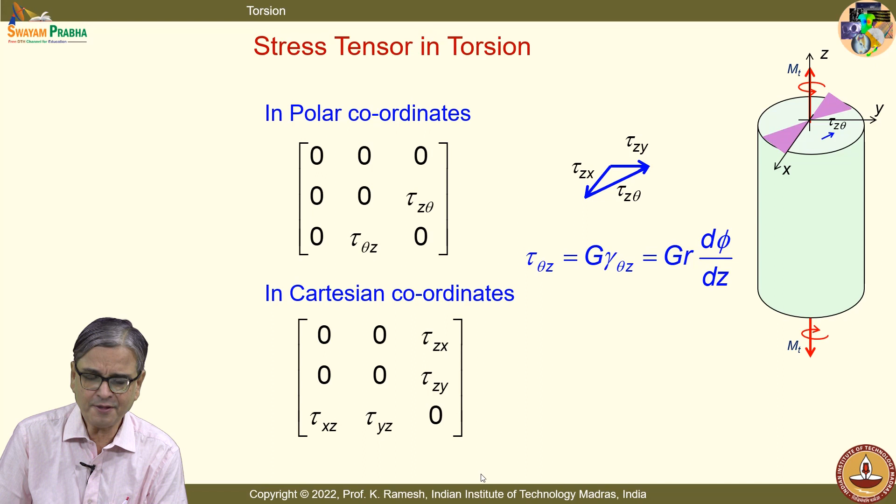We have looked at the utility of stress invariants. Which invariant do you have to worry about for establishing this as a shear stress state? I1 — what is I1 here in polar coordinates, and what is I1 here in Cartesian coordinates? So you have done the transformation correctly, and you understand that the stresses developed in torsion can be represented as a tensorial notation, both in Cartesian and polar coordinates.

So in this class, we have graduated from looking at the deformation to find out the strain components. We found that among all the strain components, only gamma theta z exists; all other strain components are zero. From the stress-strain relation, we could find out tau theta z, and equality of cross shear says tau theta z equals tau z theta.

Then we also developed and verified whether equilibrium is satisfied: the distribution of shear stress, when we find the moment about the axis, should balance the twisting moment.

We have also learned that the entire surface is free when I twist it, this complete surface is free. We have utilized this knowledge for a square shaft under twist: even though we have not found the stress distribution in the case of a square shaft, you can find out that on the 4 lines which form the corners, the stress tensor is zero. Thank you.